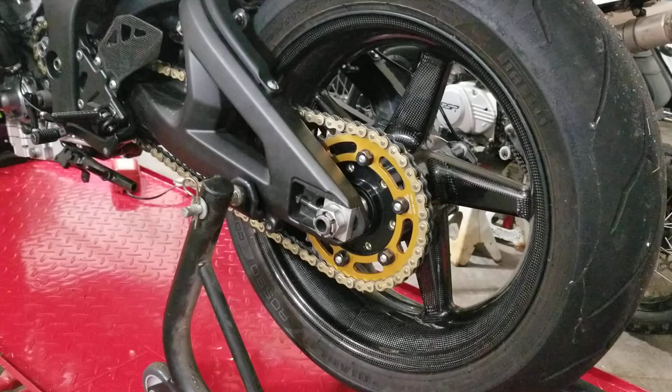So I'm going to walk you through how I saved over 17 pounds of weight on my ZX10 by doing carbon fiber wheels, as well as other common drag racing mods. I've seen road racing guys do it as well.

For the wheels, they are the Dymag carbon fiber wheels. I have another video showing you a little more detail on them and how much the wheels themselves weigh.

For the rear of the bike, I run no back brake, caliper, or rotor. What I did is take the stock bracket and grind down where the caliper bolts on, but still allow the speed sensor to sit in there.

With no rotor, I just used 2 washers to space out the speed ring, and it still picks up the speed. I run an aluminum 520 sprocket on the rear. When I was stretching for drag racing, I always ran the 520 chain with the aluminum sprocket and never had any problems with it. I just ran a cheap Regina drag chain, which has less tensile strength than the current chain I have on the stretch bike - this is a 520 Regina drag chain for a stock wheelbase that I picked up.

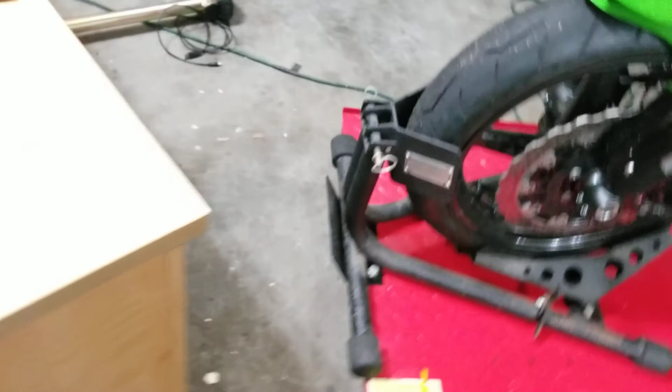I did not weigh the tires. To me, the tires are kind of invalid since I'll mostly be running a new Drag Max on the rear, and either a 120/60-17 or a 90/80-17 on the front, depending on how ballsy I feel and how much street riding I do.

For the rear, that's really where a lot of the weight was saved - the wheel, no caliper, no rotor, and obviously no master cylinder or any of that stuff. The front saved some weight too, going with the carbon fiber wheel.

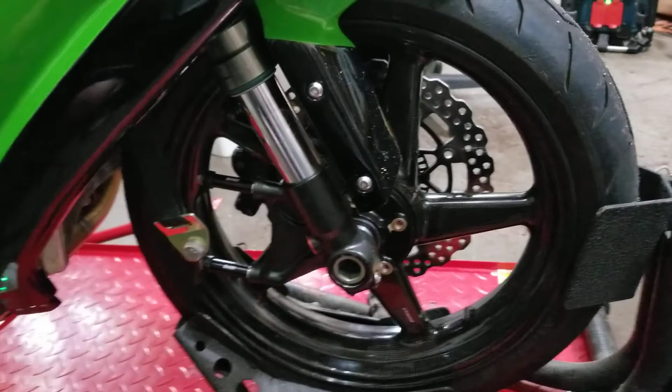But here I also run just one rotor. It's the stock rotor still, with some nice brake pads in there. Then to space them out, I also have the Brox spacers, so the strap is even on the frame and isn't pulling - I've heard that can cause some issues.

So that's a lot of it. And then here I have - excuse the messy garage - some weights.

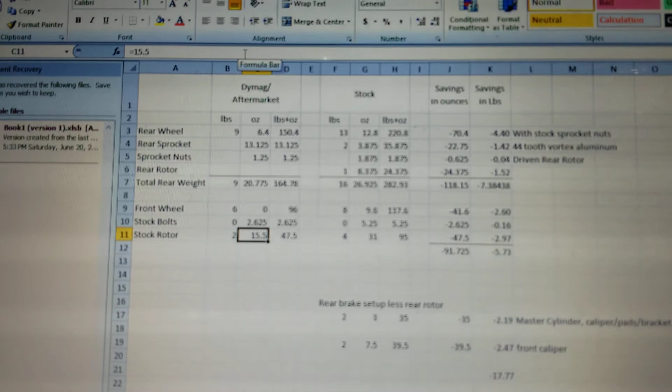Hopefully you can see this, otherwise I'll try and take a picture so you can see it better. But the rear wheel saved me 4.4 pounds.

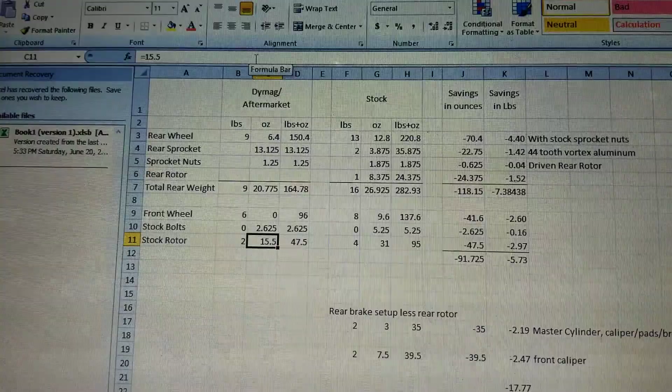I was able to go back and dig through some of my old threads on the ZX10 forum, and the stock rear sprocket versus a 44 tooth aluminum sprocket saved me almost 1.5 pounds.

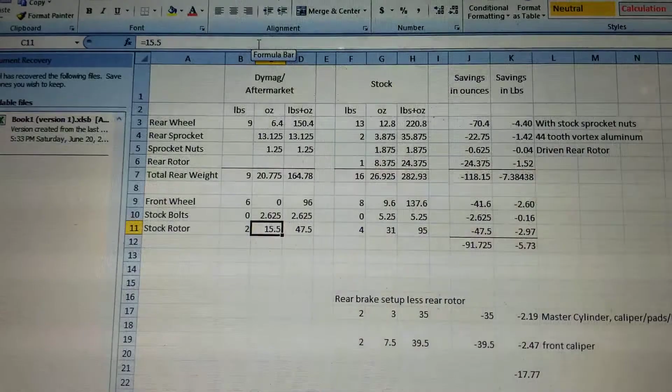I do have driven sprocket nuts on there. They're black, they're aluminum, and they look kind of cool versus the stock aluminum colored ones - saved a little bit of weight there too.

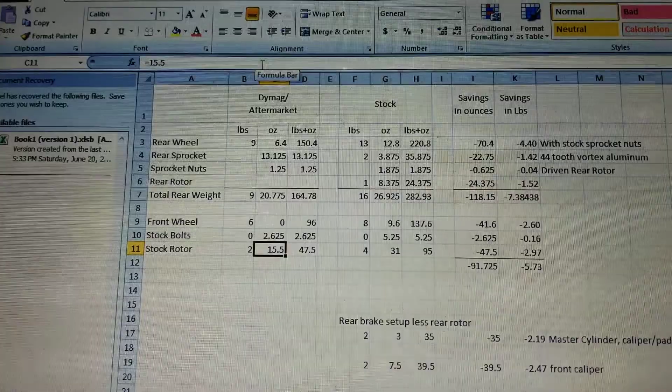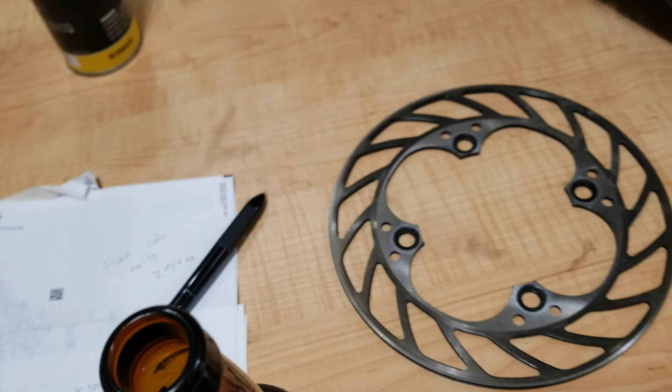Then the rear rotor saved a good bit of weight. I did have the weight of - I have an aftermarket rotor, which saved, I would guess, close to 1 pound. I can throw that on the scale if anybody's interested, and let you know in the comments.

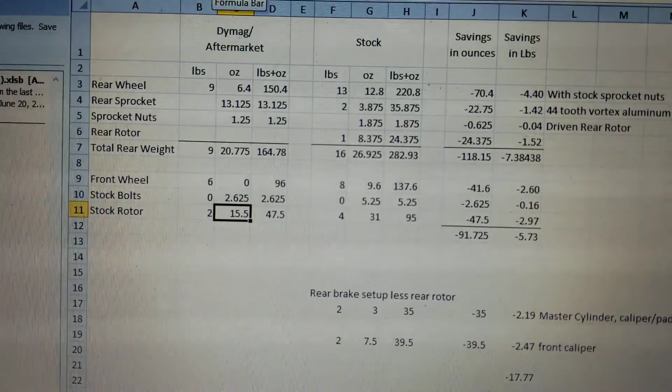Then the front wheel, I saved 2.6 pounds over the stock with that carbon fiber wheel.

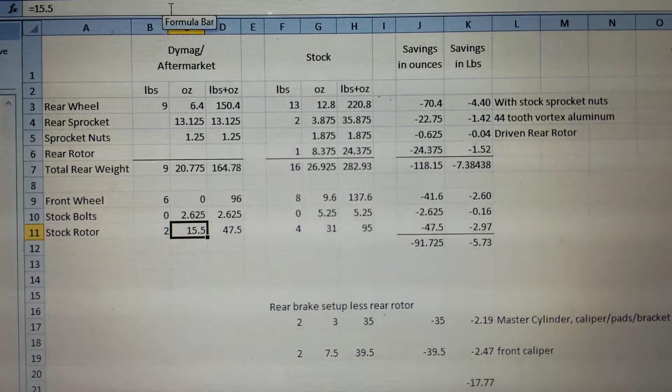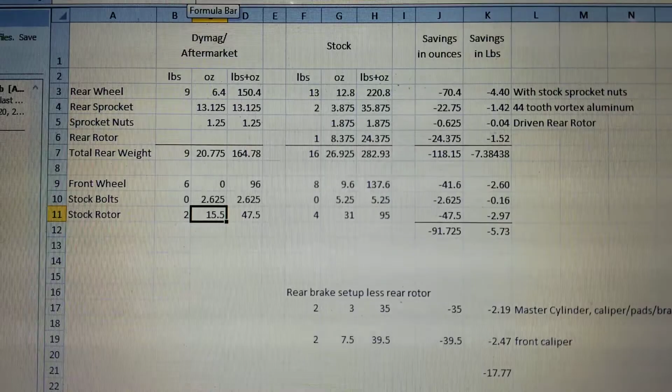I run just one rotor, so I did the math on that, and I was able to find my stock rotor bolts, and that saved a little bit of weight there as well from running only one. So overall, between the stock rears and the stock fronts and those couple changes there, I added up some weight savings.

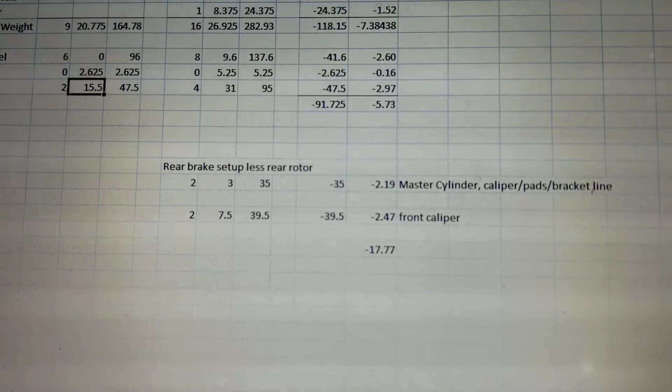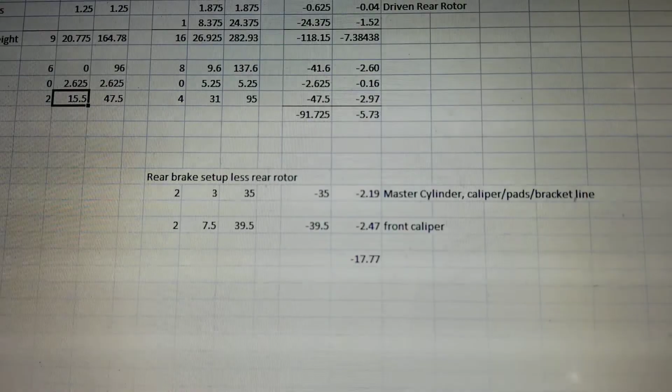And then I also went back and found my thread where I measured the rear master cylinder, the caliper, the pads, the bracket, and the line, and that was 2.19 pounds of weight I saved there. Then I weighed the caliper, dug it out of a box, and it came in at 2.47 pounds.

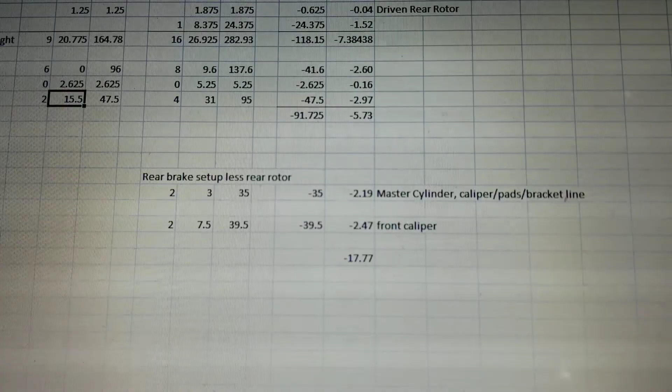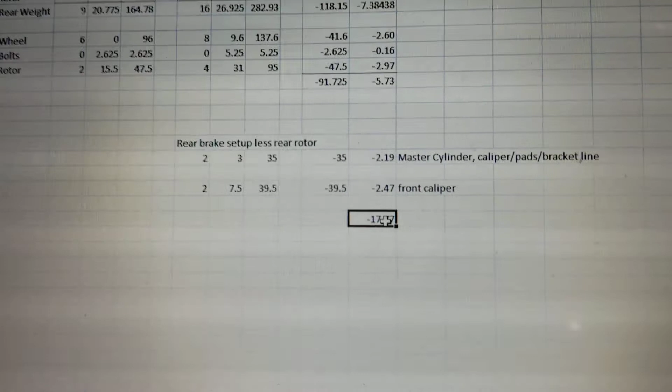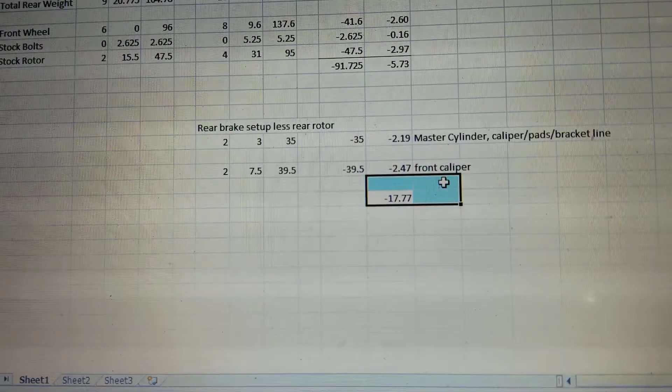So overall, you can see that with all those changes, I've saved 17.77 pounds. I did also, with the front rotor delete, go with stainless lines. I would think there'd be a little bit of weight savings, maybe by going with one stainless line versus the stock heavy stuff.

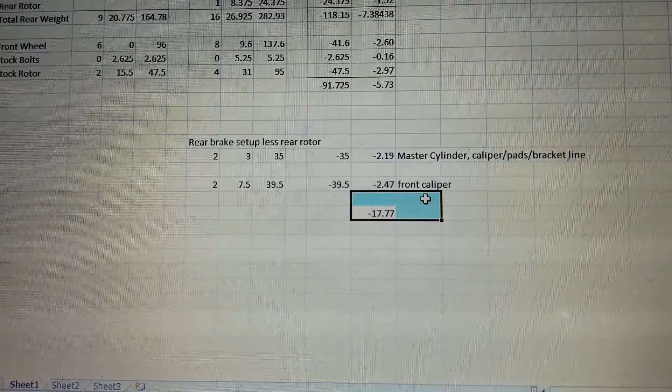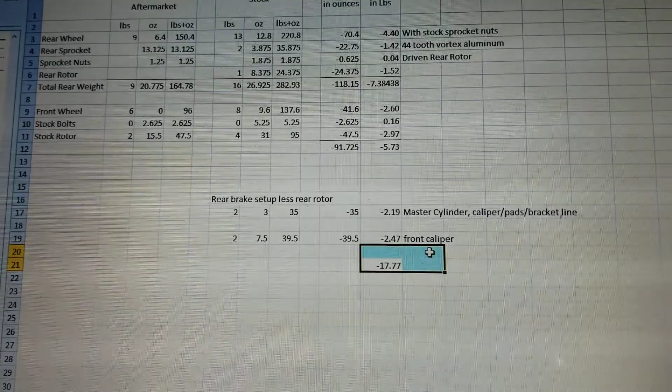But I didn't have that weight. So well over 17 pounds easily by swapping to carbon fiber wheels and then also doing some of those other drag racing mods. Would you do this on a road racing bike? Well, no. Would you do it on a drag racing bike? Yeah, I probably would.

There's a little less weight in the front, but the bike's going to be pretty long this year, so I'm not too concerned about the front end staying down. But overall, turns out I'm pretty happy with these wheels. A little bit of street riding with it, just to dial it in and tune it a little bit before going to the dyno, and the bike flicks amazing.

Granted, I'm used to a low profile front tire and a hookup on the back, but with these nice road race takeoffs, even with the bike being lowered a good bit, it's still handled really good. I could flick it side to side super easy.

If you were a road race guy, you're saving 7 pounds on wheels alone if you didn't do anything else. If you get lightweight rotors in the rear, lightweight rotors in the front, maybe some titanium or aluminum bolts for the rotors, you're usually probably going to save at least 10 pounds. And that's all rotational mass, so definitely worth it.

I'm glad I picked them up. You're going to be hard pressed to find 7 pounds elsewhere, but that's rotational mass. So depending on where you read or what you follow, it's like 7 times the weight, some people say. So that's a lot of weight right there.

I'll be curious, I want to try and get some scales on the bike and see what it weighs. It's got the MWR big intake on it, so I can't run street plastics anymore with this. It's just too big for headlights to fit in here. So with that, I'll probably run the race tail as well.

All the other little stuff, I took out all the sound deadening, those heat mats, the little clutch thing on the side, all that stuff that always just got in the way of doing clutch jet work. All that stuff's off the bike.

The bike should be pretty light the way it sits, so if I ever get it on the scales, maybe I'll make another video of the full weight of the bike. But there was your video for how much weight you saved with carbon fiber wheels over the stock Gen 4s: 7 pounds on the dot.